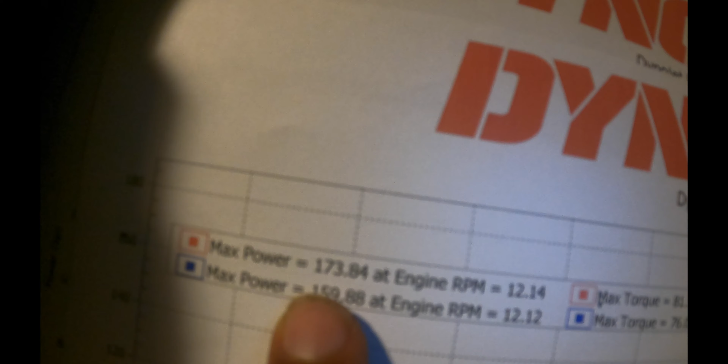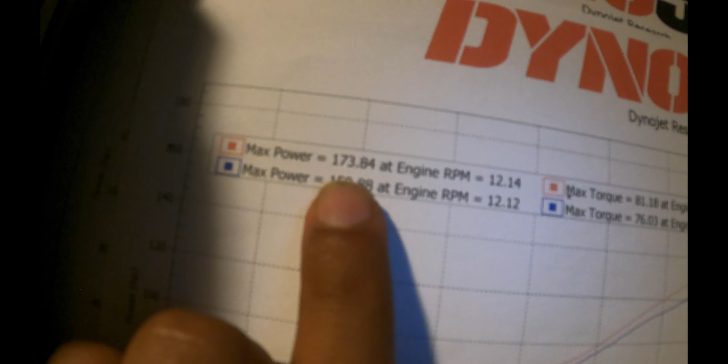So we ended up with 173.84 horsepower, and then here is the torque, 81.18. Now these numbers could be higher, but because we did it in 5th gear, it's much harder to get a higher top speed or acceleration. So that's why the numbers were so low.

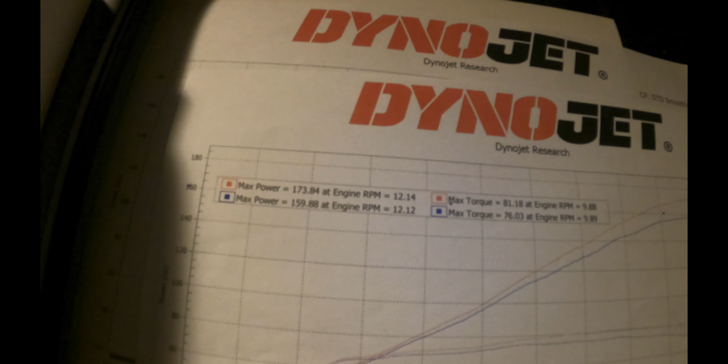Plus, to remind you guys, my bike has 23,000 miles on the motor. The more miles the bike has, the less horsepower and torque you're gonna have with the bike, compared to a bike that has 8,000 miles compared to 23,000 miles. It's just the more abuse you do to the motor, the less horsepower and torque it's gonna have.

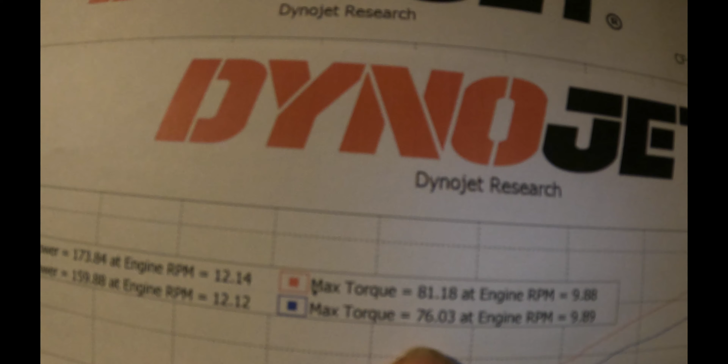So this is the before: 159.88 with 76.03 torque. Now this is the one we did with the car dyno, and I try to explain to my friends, but they don't really fully understand it, which is okay.

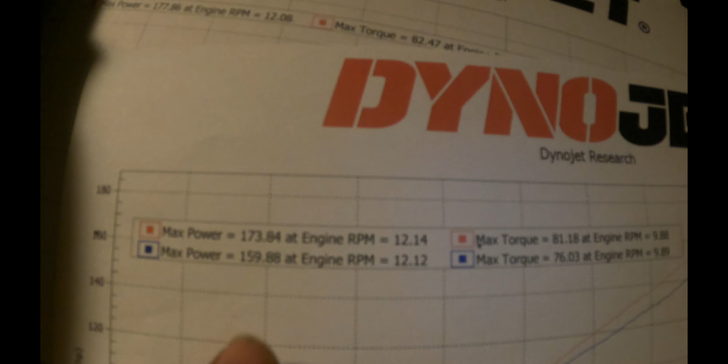You know, I'm not gonna argue with people because that's not my job. I don't make money to argue with people. The information that's given to me is the information that I give out.

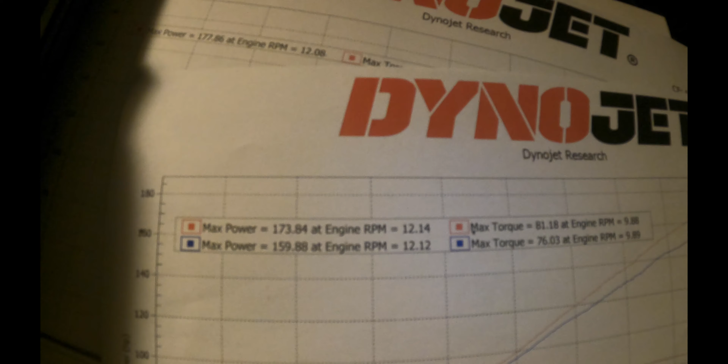So the reason why we have 159 horsepower compared to the dyno that we did, the car dyno, which was 183 horsepower, and I can't remember the torque that we had overall, is because we didn't block off the pair valve.

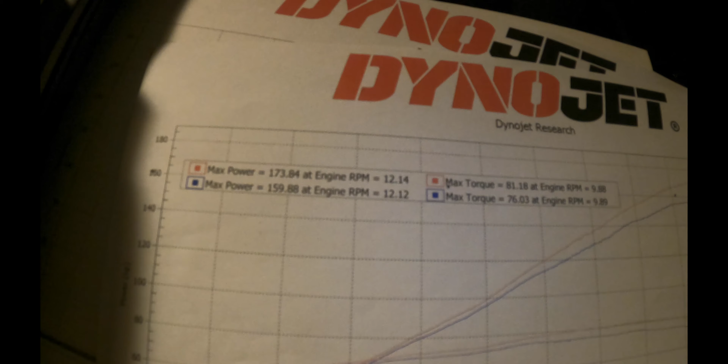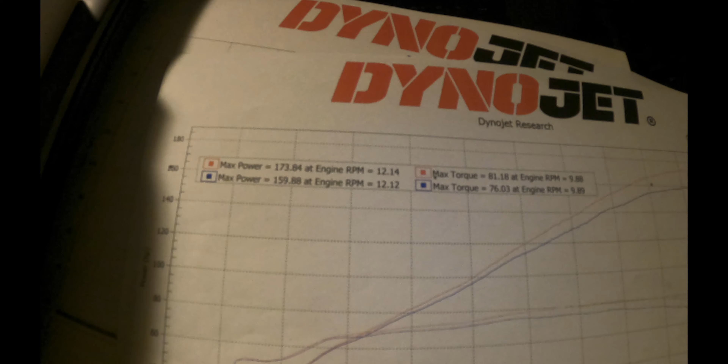The pair valve pushes fresh air into the exhaust, which gives the breathing hose a false reading because it's breathing in fresh air from the motor and putting it into the exhaust. When you block off that vacuum hose, it's not going to feed that fresh air to the exhaust, so the breathing hose won't give that false reading. It'll give you the correct reading.

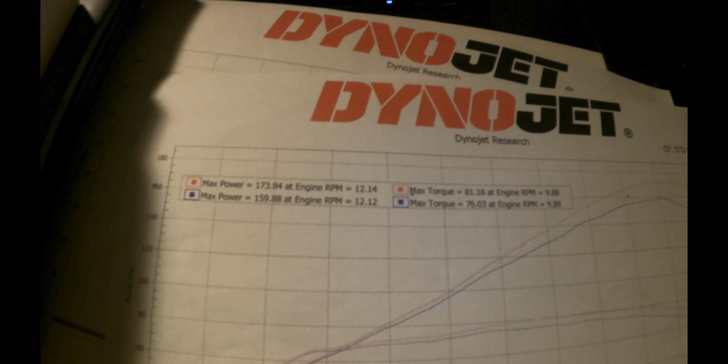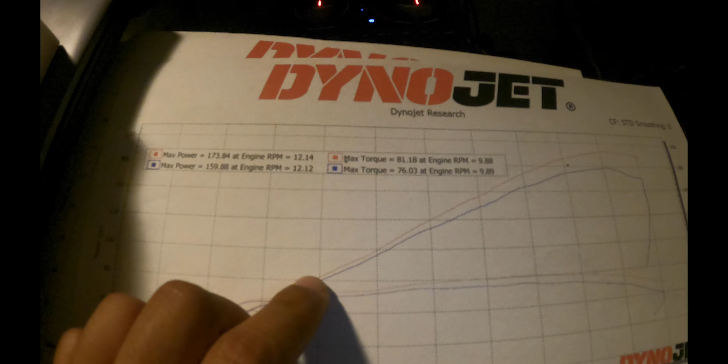So when we didn't plug the pair valve, which I knew about, I told my friend about it. He was like, no, it's all right, this breather hose is going to be able to read it, which is not true. It's not true at all. Don't believe nobody. You got to take the pair valve off or block off the vacuum hose, and then you'll get the correct reading.

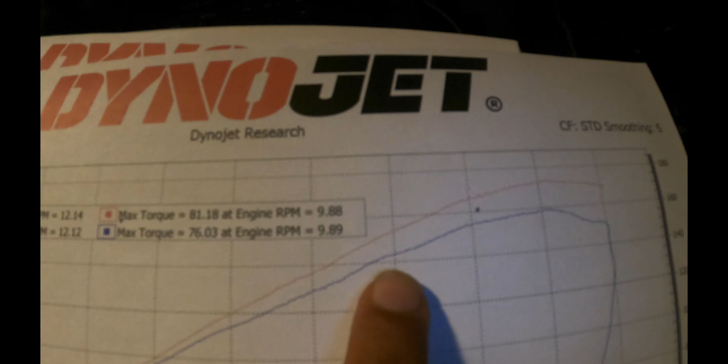Now to show you guys the fuel to air ratio with not blocking the pair valve, you can see that it's everywhere, it's not going straight. Now there are dotted lines where it's supposed to be smooth at. Don't get me wrong, he doesn't got it completely smooth at the bottom.

To get this line perfect, sometimes you got to do multiple dyno runs. Brock's Performance talks about this. I watch a lot of his videos, I learn off of him. If he doesn't know what he's doing, then why does he got his name out there on products? So I watch a lot of his YouTube videos and I learned from him.

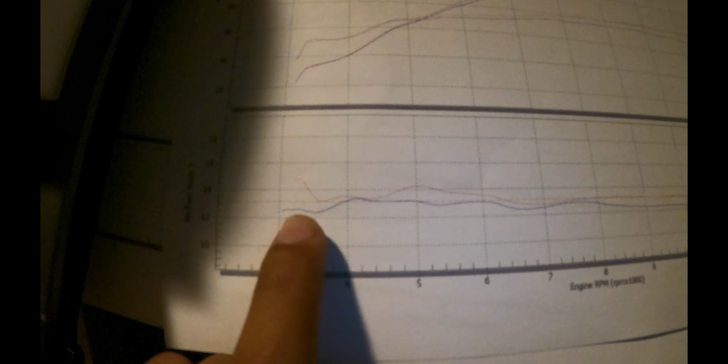The blue line was the one before and then the one after. So to show you guys, it's still everywhere in the beginning, but then he straightens it out towards the end. Then it becomes straight. Again, I don't know if he can fix that part. I didn't get to talk to him about it.

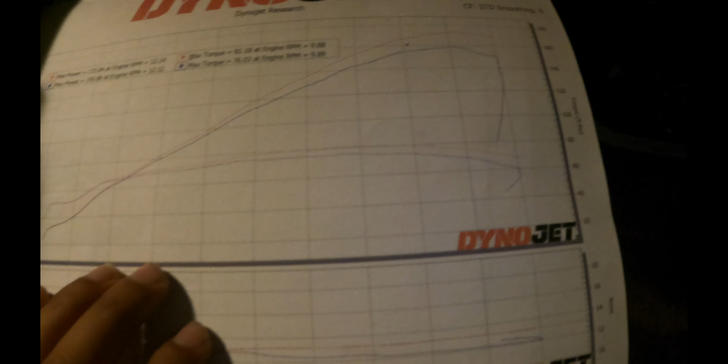I was just more worried about the overall horsepower and torque. But as you guys can see, he did say that the bike is running good, it's not running shitty. I did change a lot of the spark plugs, coil packs, air filter, oil change, oil filter. So I did a lot to make sure that bike stays in good condition.

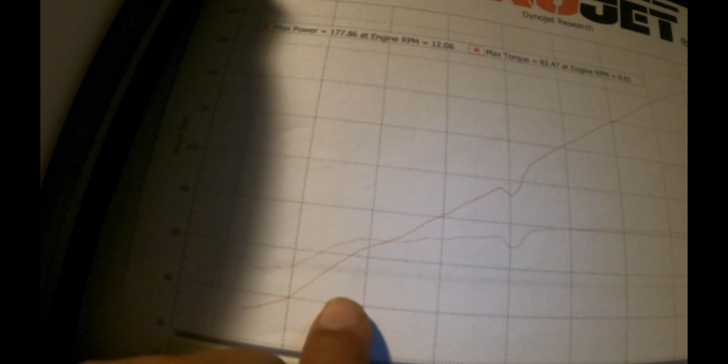So this is the MR12. I'm gonna try to end this really quick because I don't want to make this too long. So the MR12, we put it in - this is without a tune, no tune. We got 177.86 with no tune. So we did good horsepower, and I don't know if we got torque.

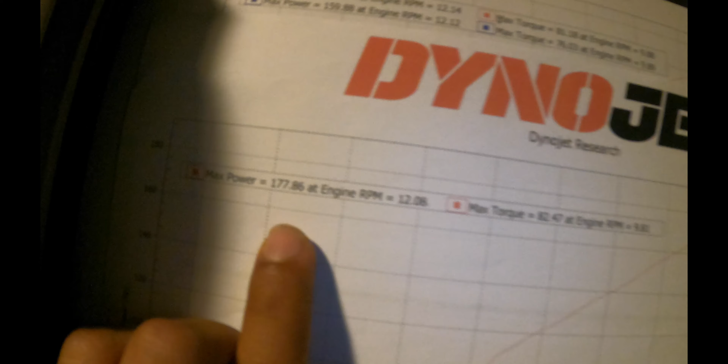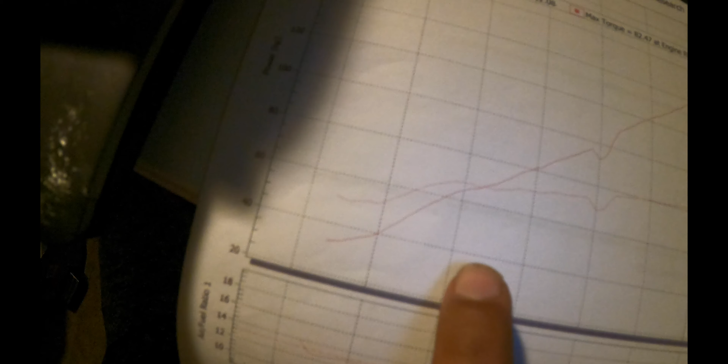I gotta look at it. Oh, we got a little bit of torque - 82.47 compared to this one up here. So we got about 4 horsepower alone just on the MR12 without tuning it, because it needs tune. So the reason why he stopped the bike was because of this dip.

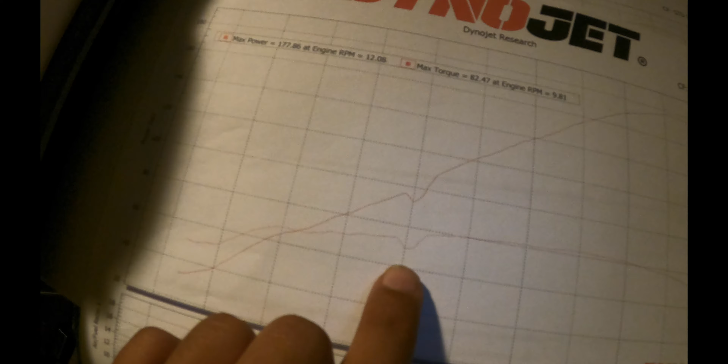When it did this dip, the bike wasn't liking the fuel that we put in, because that fuel was already damaged. If we would have continued running this fuel, we would have damaged that bike even more. So he stopped the tune.

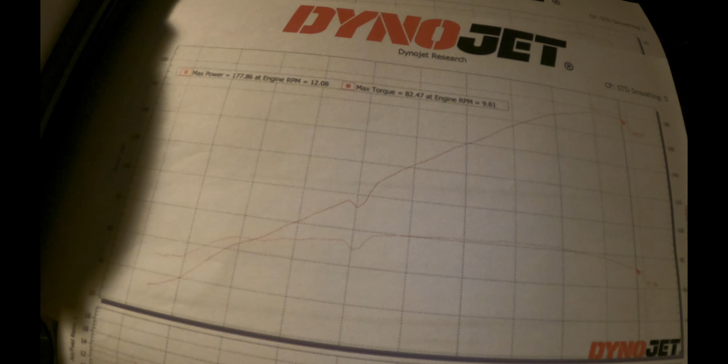We only got to run one pass without a tune. He said, we're not even going to bother with it, I don't want to damage your motor. So we took it out and we didn't follow through with it.

But yeah, so that's why we didn't get to run MR12, because of my mistake. I do have a fresh can downstairs. He said, I don't know why you didn't bring me the fresh can. It's because I didn't know any better.

So a lot of times when you do dyno racing, it's called test and tune - you test the bike out, and if you made a mistake, you can go back and fix the tune. So basically this is a test and tune. You make a mistake, you gotta fix it, you gotta make tunes or adjustments. So that's where we're at right now.